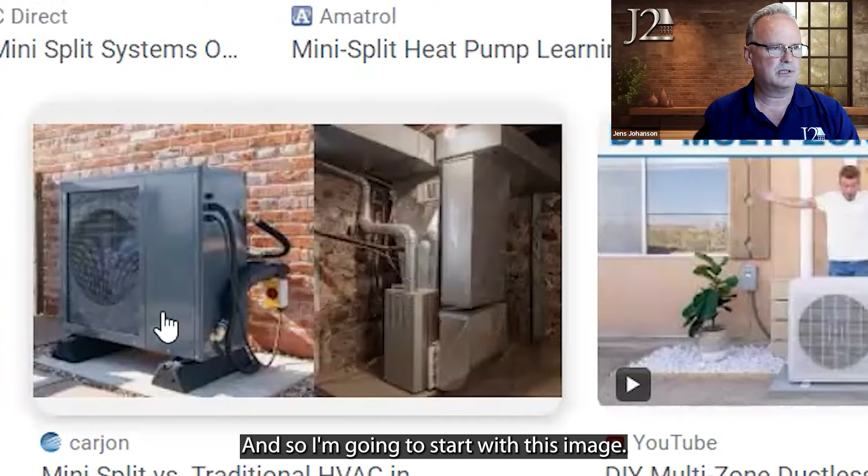And so I'm going to start with this image. And this is the old school forced air, what we used to call, just central air. And so you've got an exterior, I call them heat pumps, they're condensers, things like that. So you got an exterior unit. You do have some condensate lines over here. You've got some electrical, but it ultimately comes to your furnace.

You might have another unit right here, or this may be part of your furnace system. But the idea is that any cold air comes into a trunk line that then attaches to the rest of your ductwork. And so that outside unit has to be big enough to cool the entire house. So it just plumbs into your existing heat duct system.

So this is a central air idea where I've already got a furnace, I've already got ductwork, and I'm just kind of putting a trunk line on it so that I get cold air out of every vent in the existing home or office or whatever you have there.

And so it's kind of similar, but you have this pad mount unit, you have some condenser lines, you have some control wires, things like that, but you have kind of this bigger heat pump.

Now, let me take you over to this one, which is an image of a multi-head mini split system using one exterior mounted condenser. So the difference between the mini split and the forced air system, the mini split has these nice, attractive, you can see over here, these high wall mounted units, maybe one in the common area, one in the bedroom, but we'll get into that later.

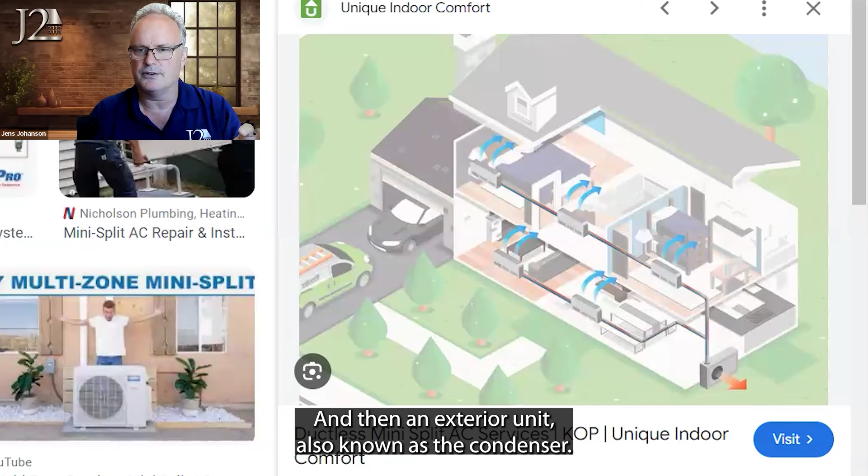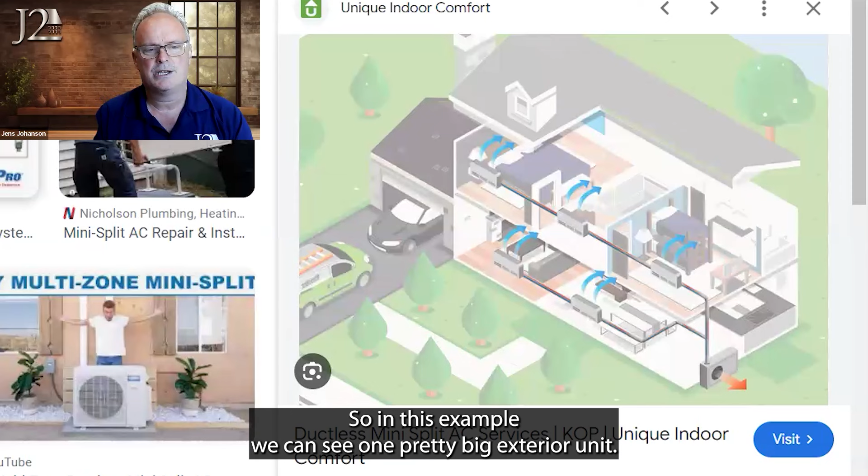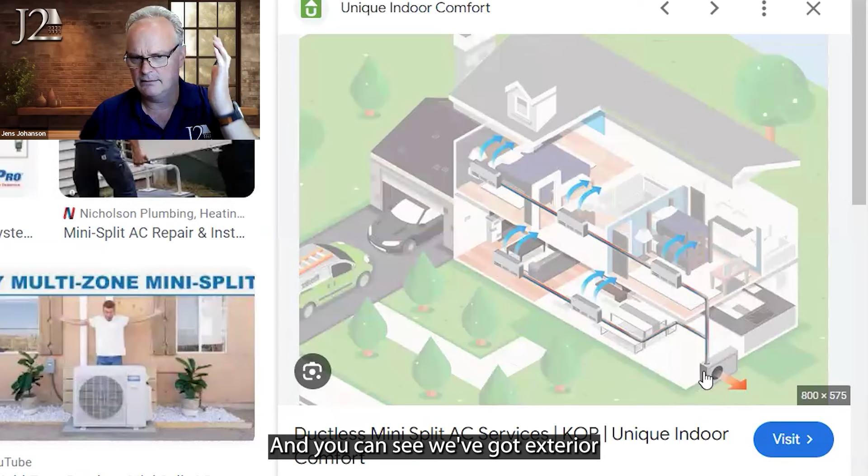But you have an interior unit, we'll call it a mini split interior head, and then an exterior unit, also known as the condenser or the heat pump. I'm sure I'll get some critique on that, but for purposes of this, we're talking interior and exterior unit. So in this example, we can see one pretty big exterior unit plumbed to 5 interior units. You can see we've got exterior condensate lines, but then it goes inside.

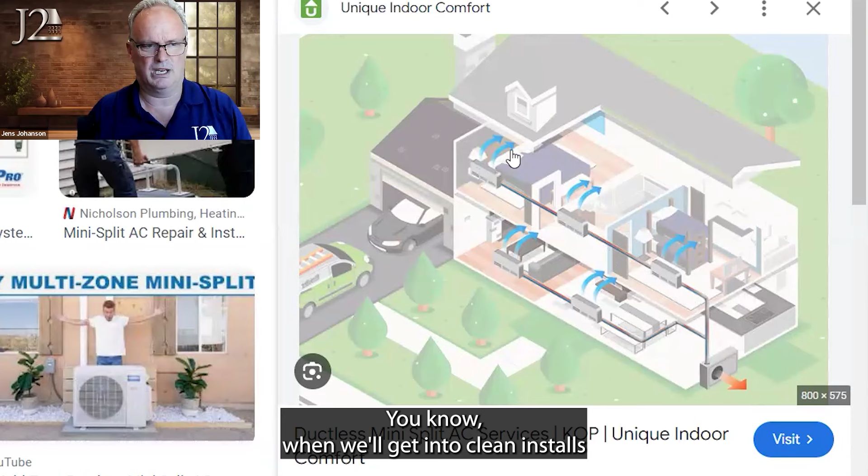I'm assuming these lines are buried in the wall, and that's something else to consider. In new construction, we can put all the stuff in the wall, you don't see anything. In existing construction, where we're adding it, we're either cutting into the wall or bolting this stuff to the outside of your building, and even on the inside, covering it with some kind of conduit. We'll get into clean installs and not clean installs.

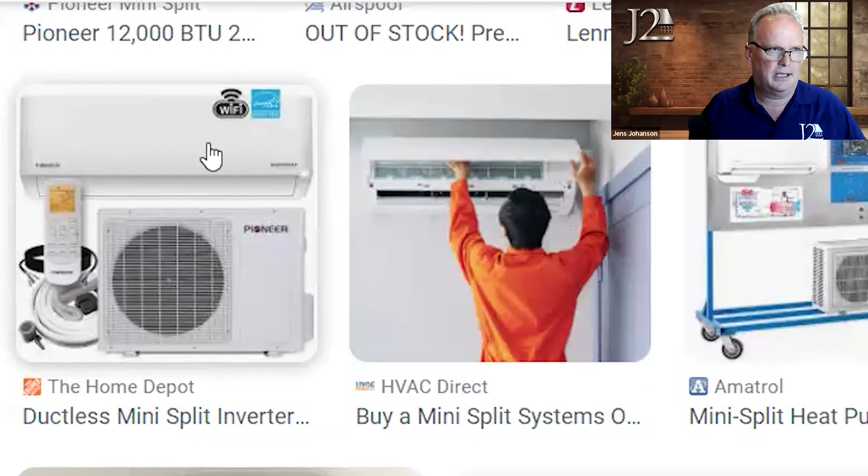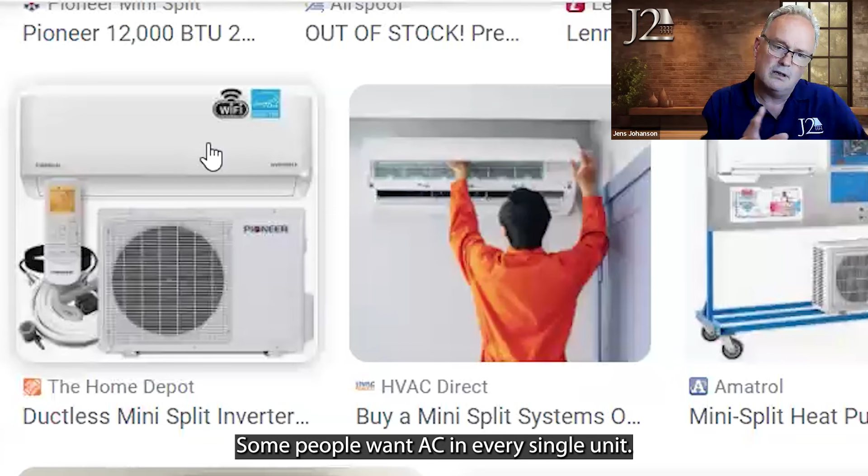So here's an example of a 5-head unit, and here's a photo of just a 1-head unit. Condo units will call and say, hey, I've just got a 1-bedroom, 600 square feet, I just want one interior unit in the main common area. I'll run that when it's hot outside and it'll cool down the unit. If I want to get extra special, I'll put 1 head in the master bedroom and 1 in the common area, so now I've got a 2-head unit. Some people want AC in every single unit, so then you put in 5 heads like this diagram.

What if I've got unit 301 that's elevated, 3rd story, and they want to put it on their deck? Now I'm going to have vibration noise. This thing is a big fan, it runs and makes noise, and that's going to reverberate through the entire building or an area of it. When you've got a party wall, they have their deck and the other guy has his master bedroom. Well, I'm trying to sleep and I hear his vibrating exterior unit on his deck. So there are some things, insulating feet, rubber gaskets, anti-vibration mounts, we're thinking about.

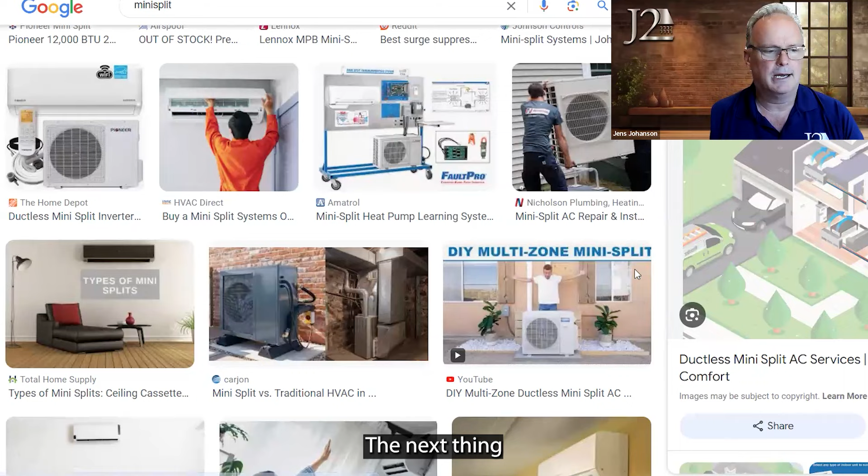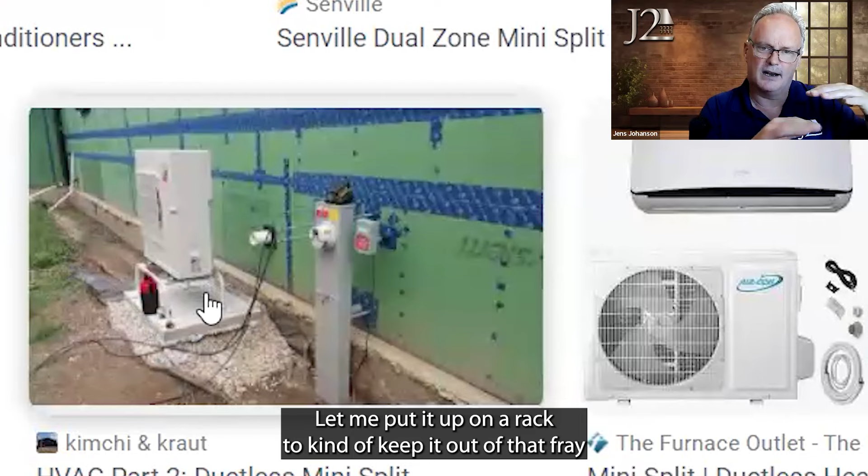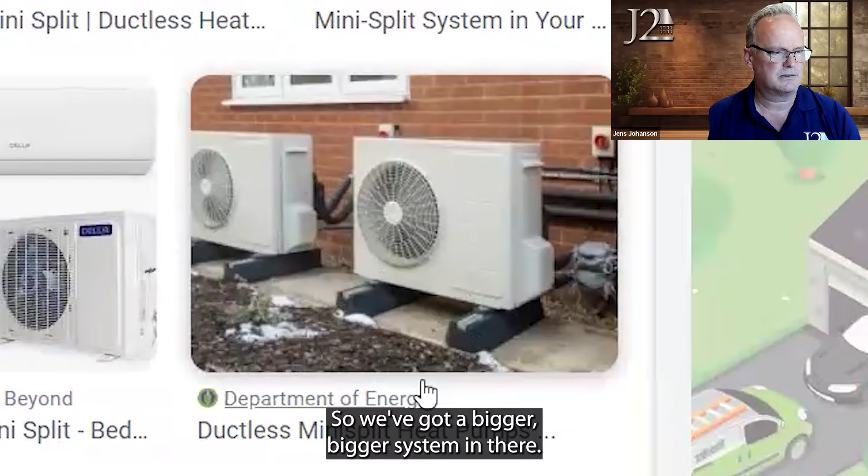Let me scroll through and find it for you. Here's another pad, here's another pad. Let's talk about that pad with the rack, a pad with an elevated rack. This is necessary for locations that have constant snow on the ground year round, or in more sandy, arid, dry, dusty areas where the wind blows and dust is blowing across the ground, or leaves and pine needles and things like that. Let me put it up on a rack to keep it out of that fray so I don't get so much sand and dust in there. So this is an example of a unit sitting on a pad, but also on some rubber footings here. And here's 2 exterior units, so we've got a bigger system.

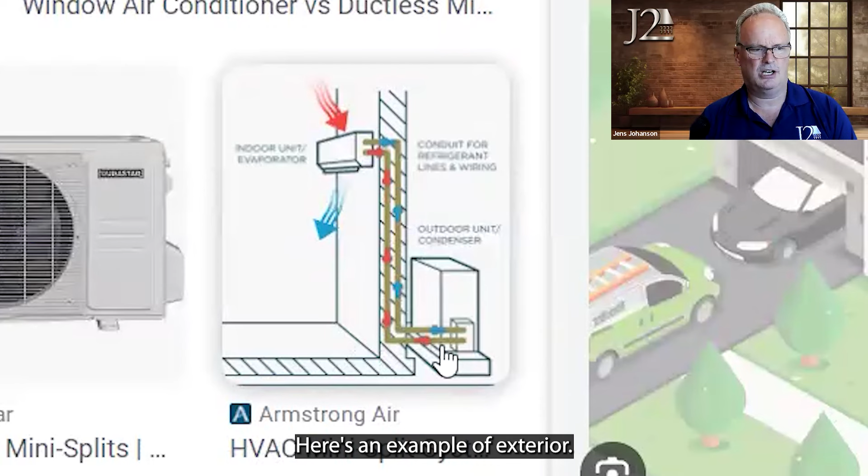Let me find our... here's an example of exterior where I can run my lines inside the wall into the unit. It's real clean, I don't see a bunch of outside stuff.

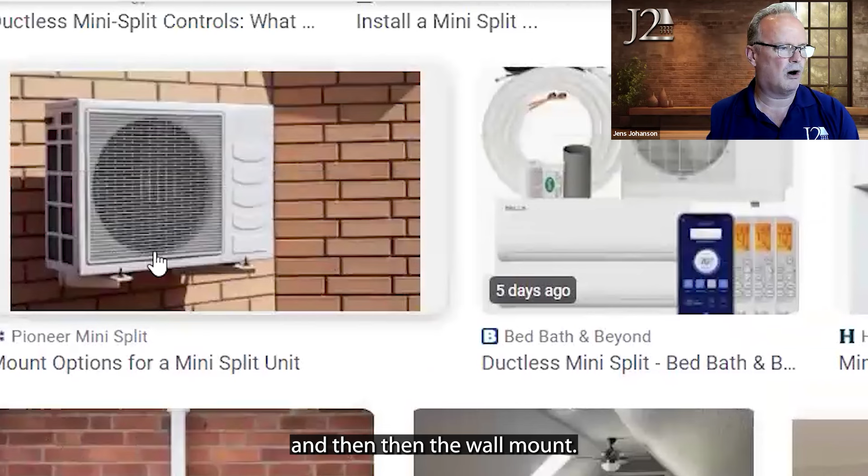And then the wall mount, that's the 3rd option. I've got some steel brackets mounted to the wall, and this thing sits up on the wall. Again, it keeps it off the ground, out of the snow, out of the dirt, or it's for an elevated 3rd or 5th floor unit, and we've got these things bolted to the wall.

So again, we've got vibration, and now we start getting into looks or aesthetics. If I'm standing at the street and I see this beautiful 3-4 story building, and now I see these heat pumps or exterior condenser units kind of mishmashed all over, not in a nice line, not sequential, not a pattern, versus I'm going to put mine here, mine here, mine here — you start getting into what looks like real ticky-tack bolt-on after-effects.

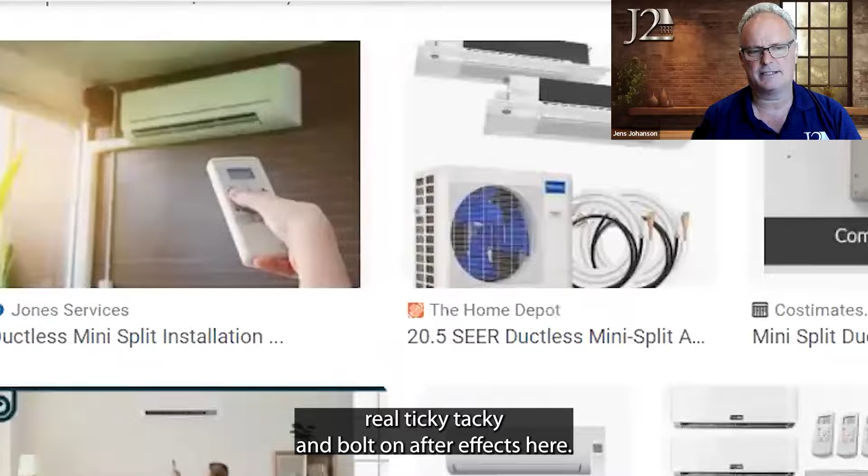So anyway, I'm still on the Google thing. Let me just take you through some of these pieces now that I've set some of the groundwork for you.

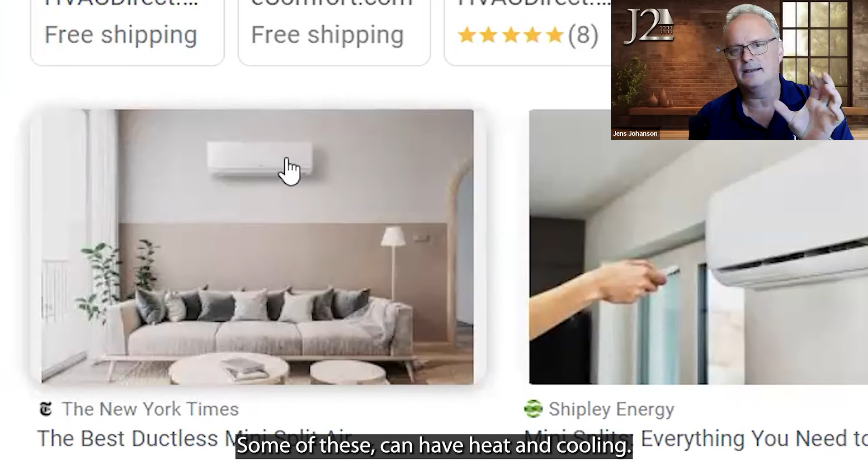They're the head unit, nice little attractive units above a couch. The cool air is going to blow on me. Another thing we can add on while I'm thinking about it, some of these can have heat and cooling. Some are just cooling, so it's important to understand what you have there.

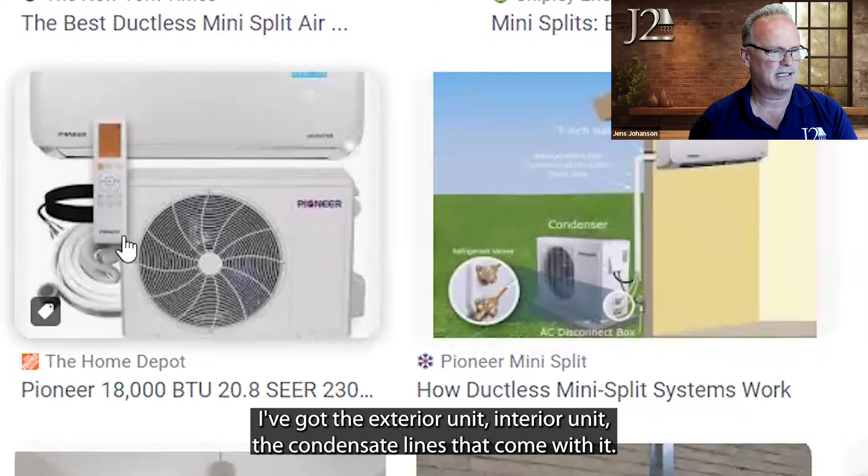This is a one head unit. I've got the exterior unit, interior unit, the condensate lines that come with it. Here's an example of that diagram, and here's what we're talking about.

It says 3-inch hole through wall, and how we prepare that opening, make it watertight, tie it into the existing WRB, make it like any other penetration, like a bath fan or light fixture. Put flashing above it, as opposed to doing your best and caulking the rest, or spraying foam around it and hoping it won't leak.

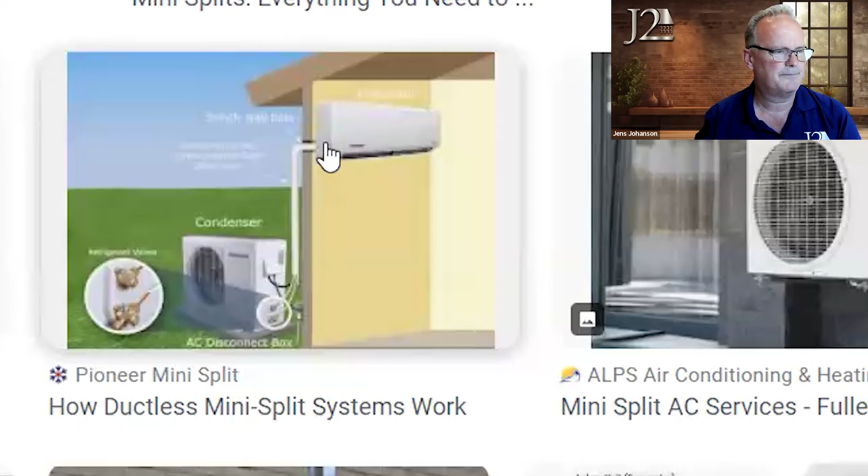So here you can see an exterior wall mount unit. It's a pretty small one, but still mounted to the wall, mounted on the brick.

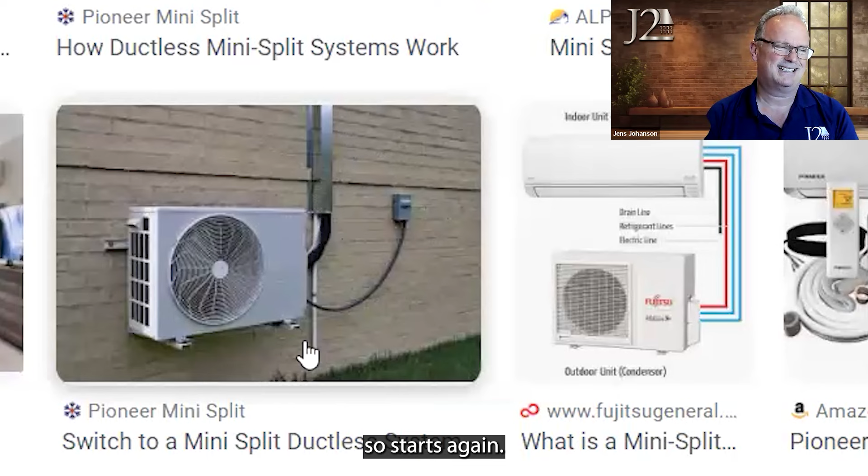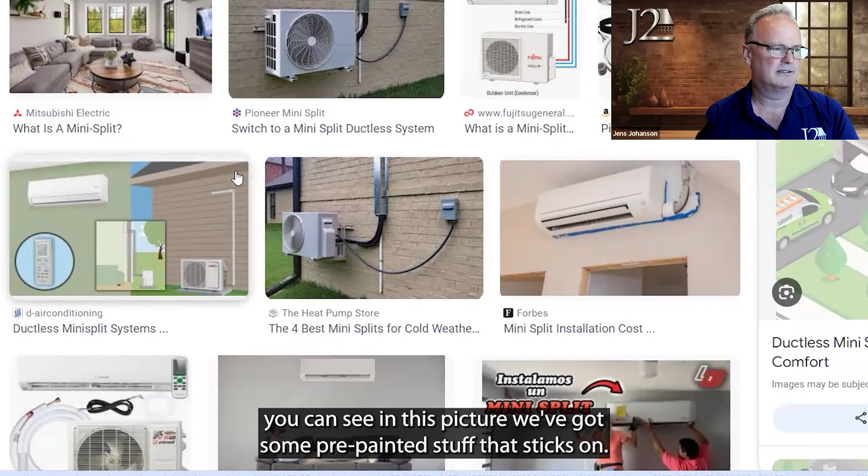Now we've got a bright, shiny conduit, a big long pigtail to the 220 outlet, so it starts getting kind of busy. It's square conduit, we've seen some round conduit. Here's some other examples - you can see in this picture we've got some pre-painted stuff that sticks on, looks a little cleaner.

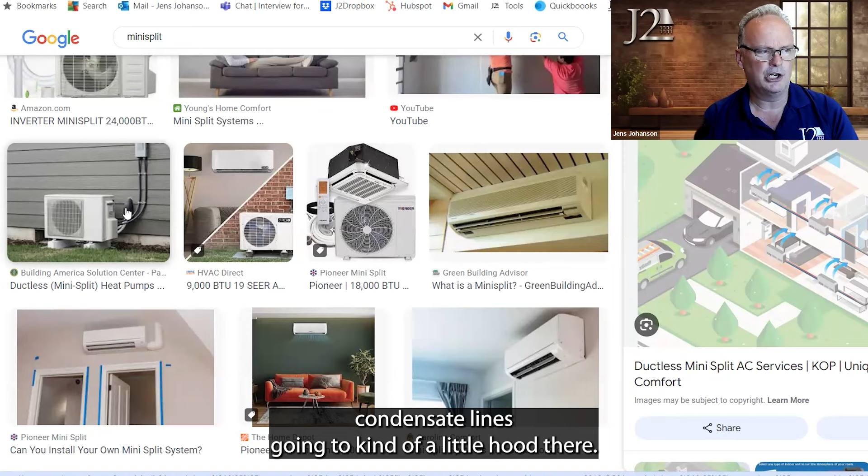An example of exterior mounted unit, condensate lines going to kind of a little hood. Then we got some ugly electrical lines running down here. So how we can tighten these things up and make them cleaner is important for everybody's benefit.

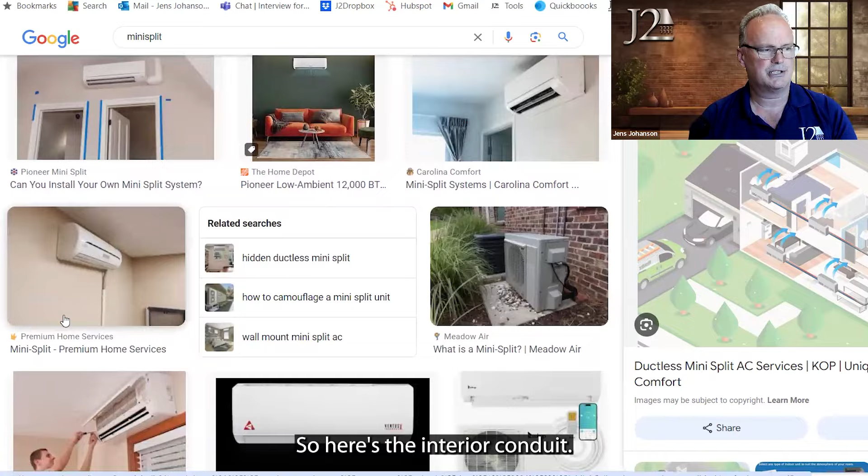So here's the interior conduit. Maybe they came through low and went up the inside of the wall, wrapping it in some plastic stuff. So again, some things to think about.

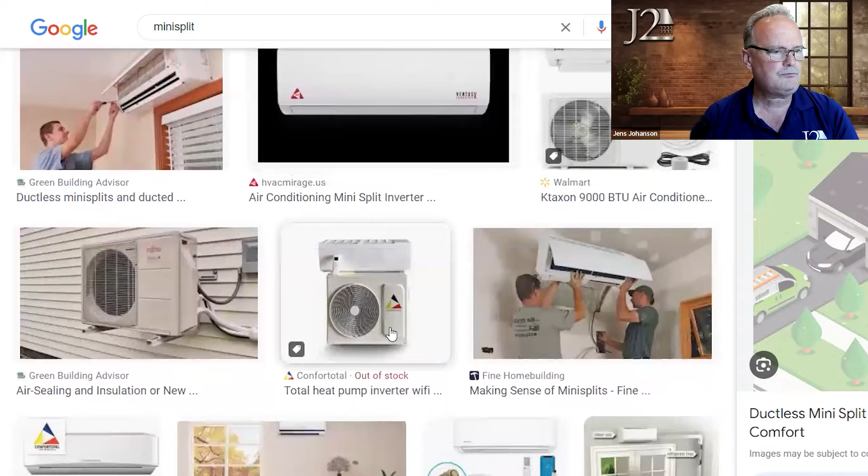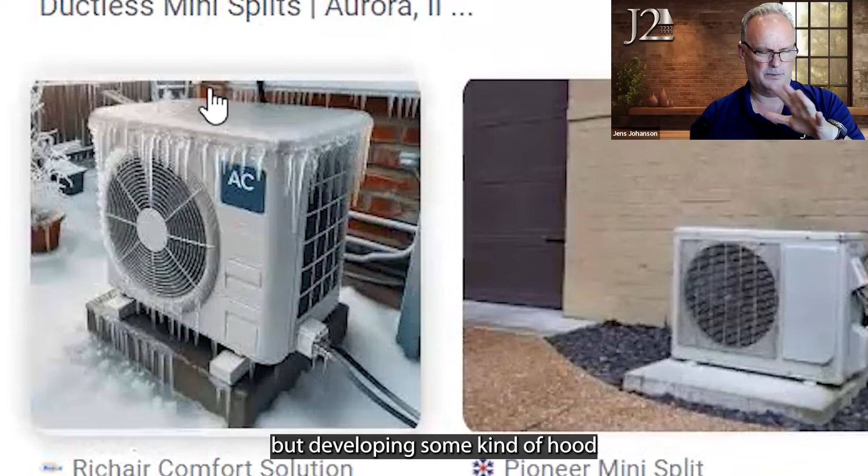But developing some kind of hood to keep the ice or snow out from it depends on the condition and environment you're living in.

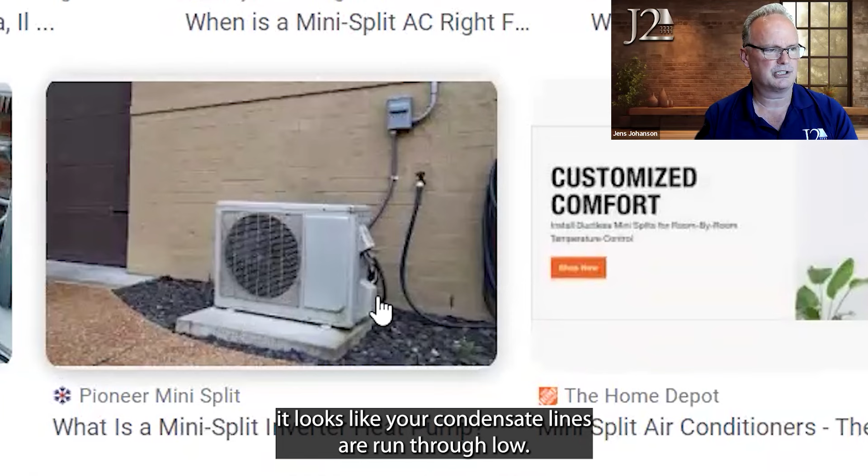Here's a pretty clean one on a pad, has some conduit, again exterior electrical conduit, and then it looks like your condensate lines are run through low. The interior units look good.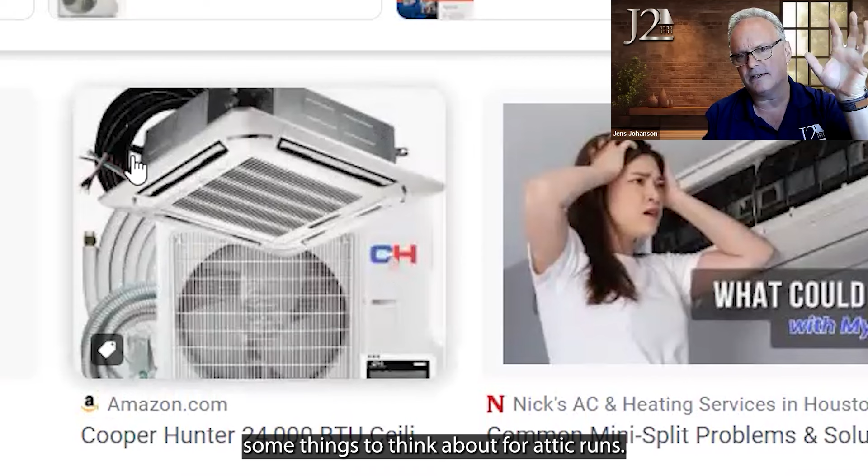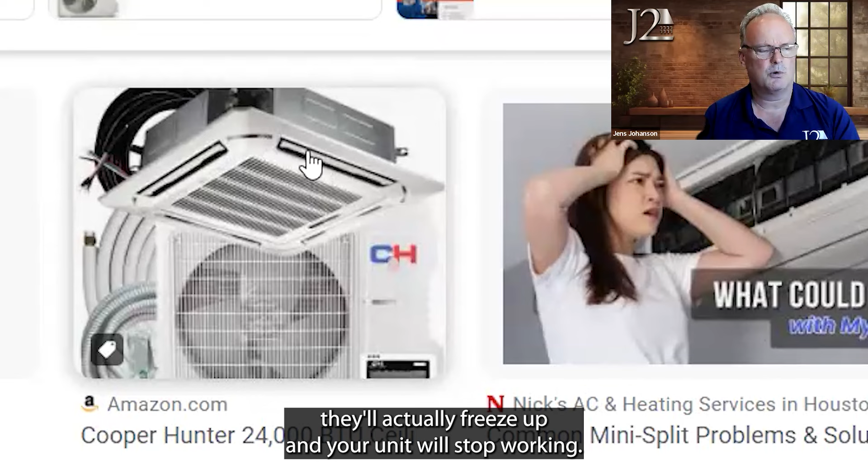Some things to think about for attic runs - we see some condensate lines or drain recirculating lines, whatever you want to call them, they will freeze up. If the attic isn't insulated, or if there's fresh air flow, they'll actually freeze up and your unit will stop working. So how do we heat tape those, how do we make sure they're working correctly?

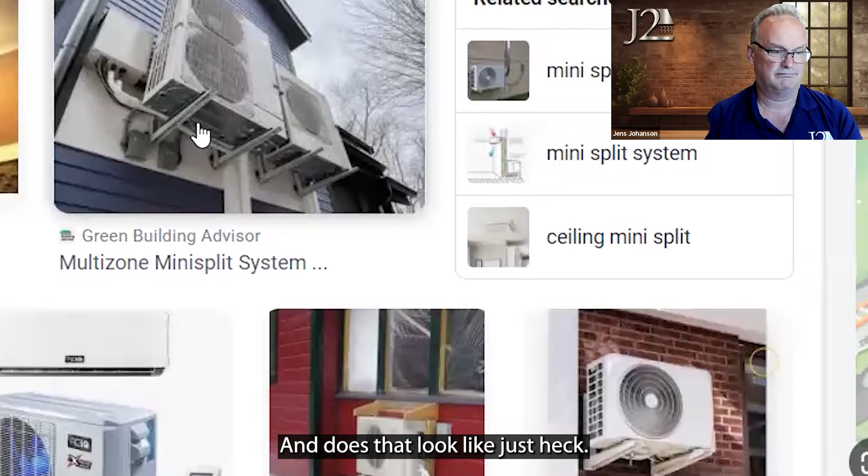So here's a big old double unit, probably for multiple zones, and another one. It's bolted onto a big panel. Okay, now we start - what's on the outside of my building, and does that look like just heck? Those are some things as a board you want to be thinking about.

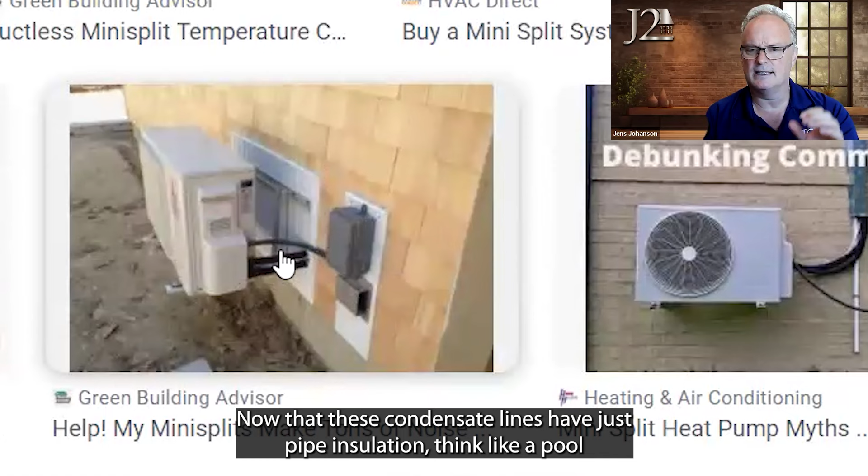Let me show you, here's a nice clean install. This is some kind of panel, takes their condensate lines through. Now these condensate lines have just pipe insulation, think like a pool floaty, and UV will actually break down that pipe insulation - it'll get chunky and start looking crummy. So you want to wrap those.

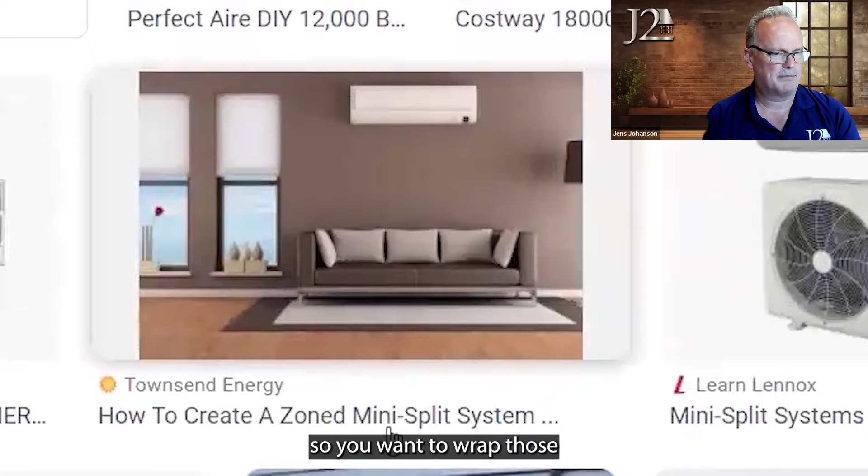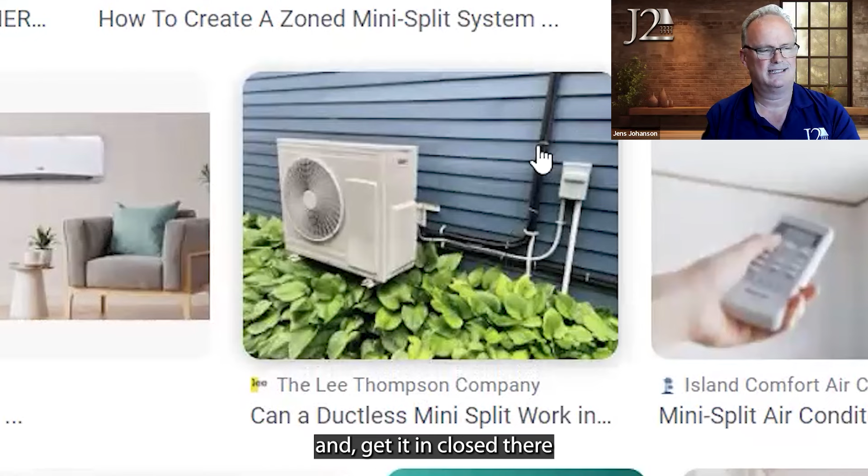This starts looking kind of chunky. You got, again, that foam insulation with zip ties and cables, and you want to get it enclosed, or get some kind of chase built or something like that.

Here's this chase or conduit stuff that they sell for the inside - they also sell it for the outside. It's important that you have a through wall penetration that, again, is watertight.

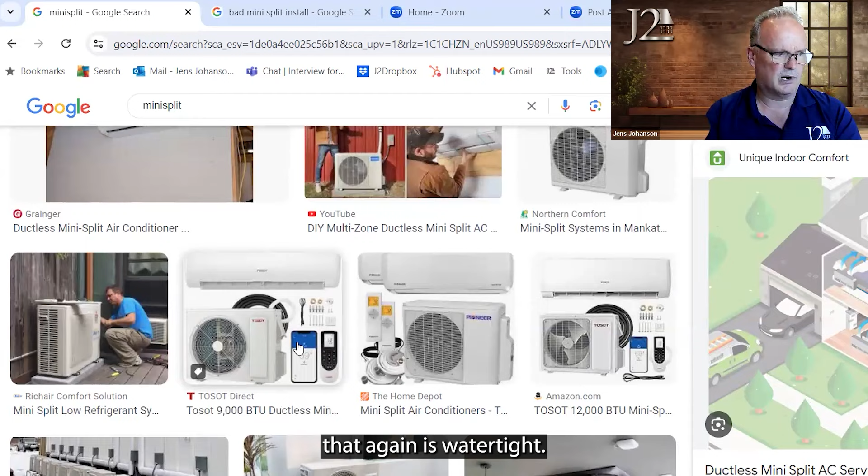Here's an interesting example of an entire building - they've chosen the back corner. You don't see this stuff, but it's kind of a decision on an area to put these things, and we have a whole bank of them. They're all up on racks, they have nice clean conduit, all your electrical boxes all line up nicely. It's well done, it looks as clean as it can look, put it that way.

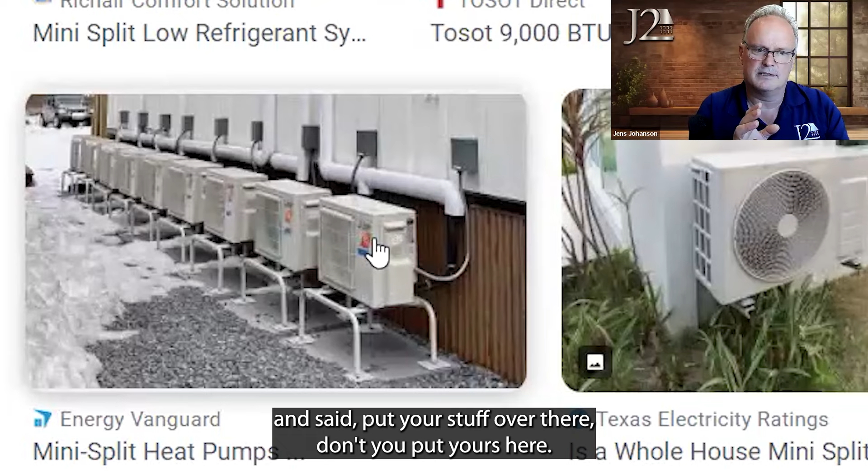But this is - so the building has gotten together and said, put your stuff over there, don't you put yours here, you put yours here - and it starts looking like a bad case of the measles with all this stuff all over your building.

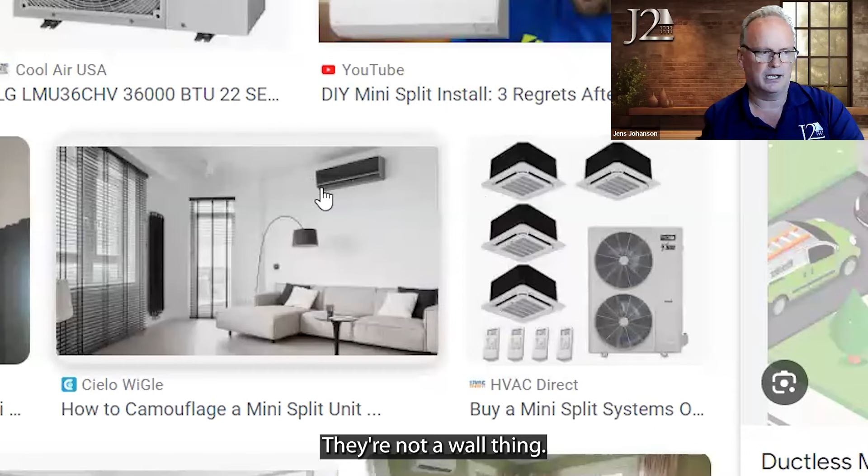Here's an example of again a ceiling mount system. You put them up in the ceiling, they kind of disappear. They're not a wall thing sitting on your wall.

Couple of other things to think about besides that through-hole penetration and vibration we've talked about: the exterior clutter of conduits and piping, a mishmash of exterior clutter, a bad case of the measles. They have their unit here, their unit here, all over the place, and it really starts looking crummy.

We've got to understand proper sizing, because that's where we see some of these fail. Each unit will say it'll cool your space to a certain degree if your unit is a certain size. So I've got a 900 square foot condo unit, but my heat pump says it'll serve 800 square feet, or bring it down to 65 degrees. In that example, I've got a bigger floor plan than the unit on the wall can handle.

We see this in developer grade construction — they provide the cheapest, smallest unit they can and point to the AC and mini split system as a benefit, but it won't cool the unit down enough. It's too small, working nonstop, and it freezes up or burns out. Pay attention to sizing and make sure you have the right size.

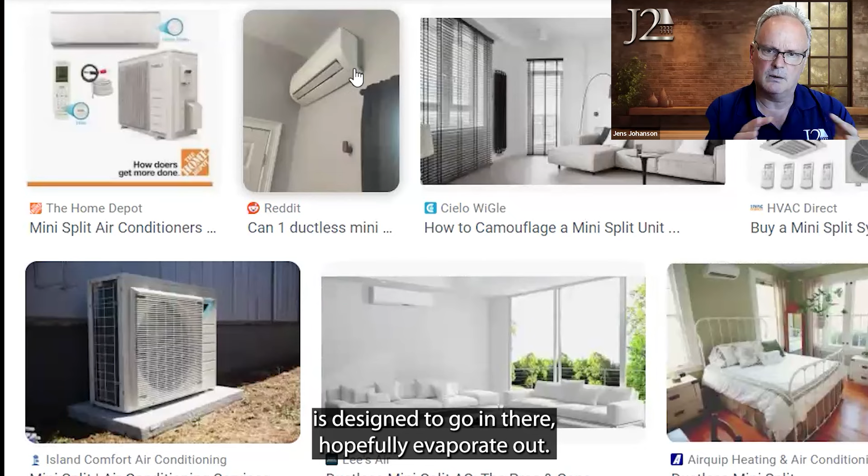The through-wall penetrations always involve sealant, which needs to be maintained and checked. The interior units also have a drip pan, like an evaporative pan, designed for condensate to collect and hopefully evaporate, but occasionally you have to clean that out and make sure it's not running back into the wall or draining down it. I'll show some of those photos a little bit later.

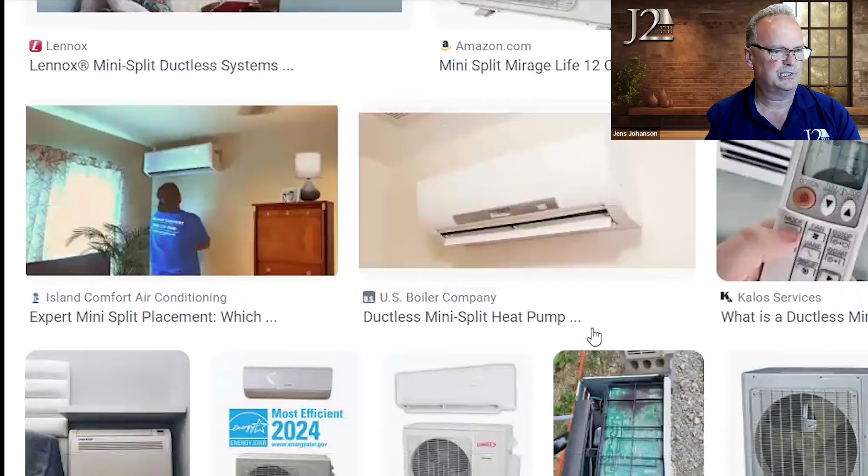Do yourself a favor when you're exploring this — just Google mini split, and you'll see some of these things. You'll find videos to watch, and you'll see the issues we're concerned about.

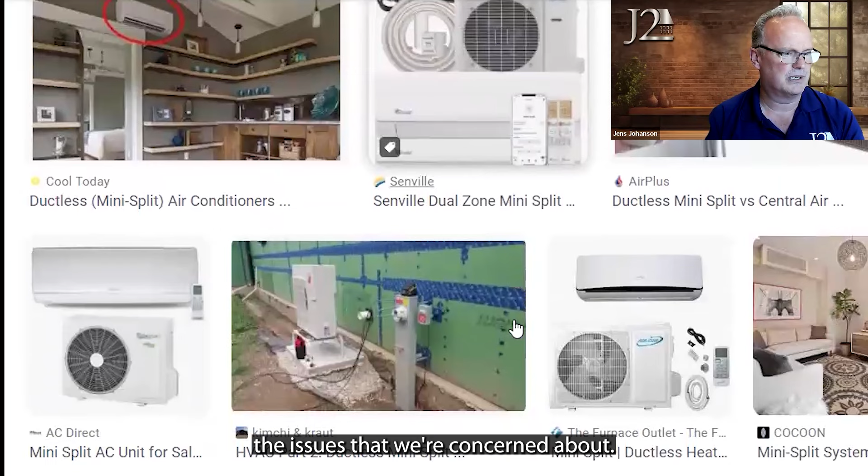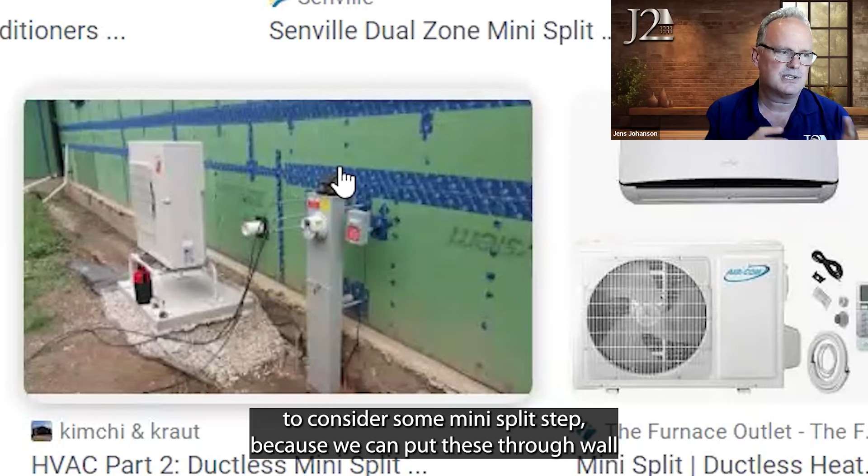Here's a good example of new construction, or at least replacing the siding. When we're doing exterior strip and reclads on existing buildings, replacing siding and fixing water damage, maybe updating windows, now is a great time to consider mini split stuff, because we can put the through-wall penetrations through the WRB, flash them correctly, and bury the lines in the walls.

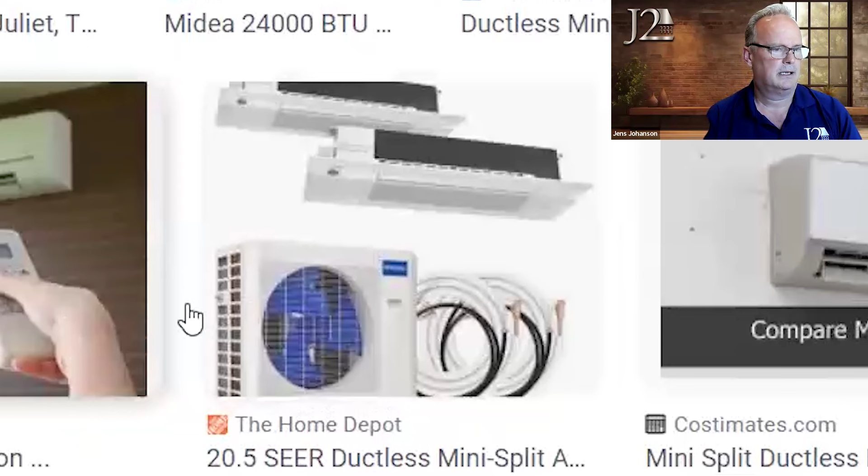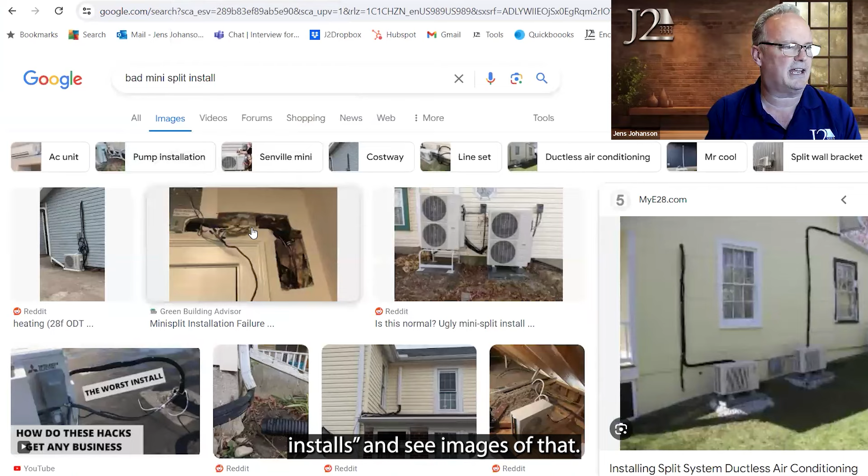Now, because Google is Google, we can just type in bad mini split installs and see images of that. So here's the big picture: I've got 2 exterior units, pipe and hose running all the way all over the building, and the foam isn't wrapped — it's going to degrade there.

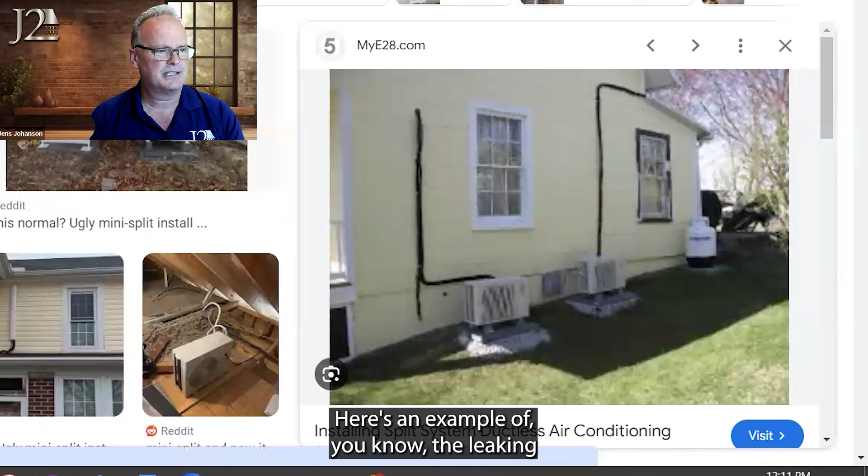Here's an example of leaking condensate lines that caused a whole bunch of water damage. We've got some rickety electrical with wire nuts not put in a box — just be careful about that.

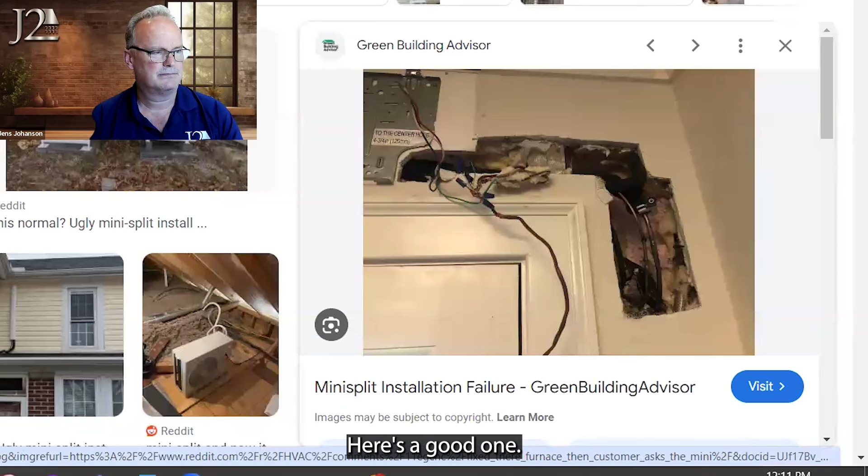Here's a good one — I didn't blow up the picture any, but I've got a whole bunch of excess hose and weird conduit running around.

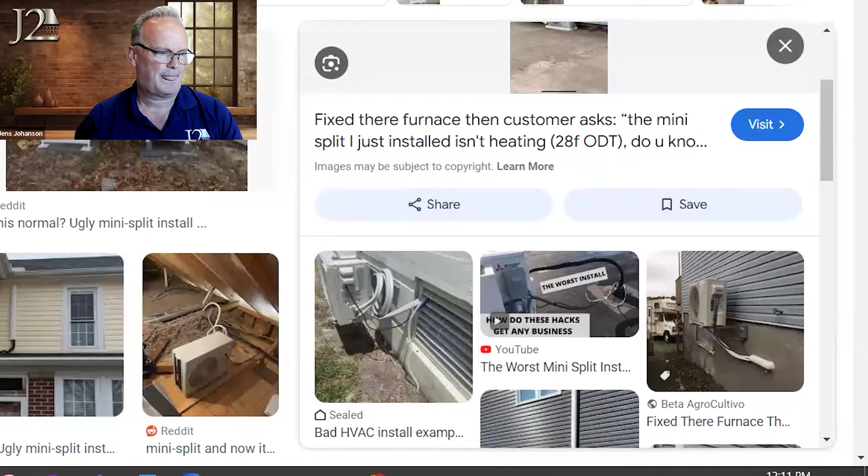Here's a classic — oh, look at this downspout, it goes up to the 2nd floor. 'I'll just run my condensate line up the downspout.' Give me a break, how's that supposed to work? Now you're blocking the downspout.

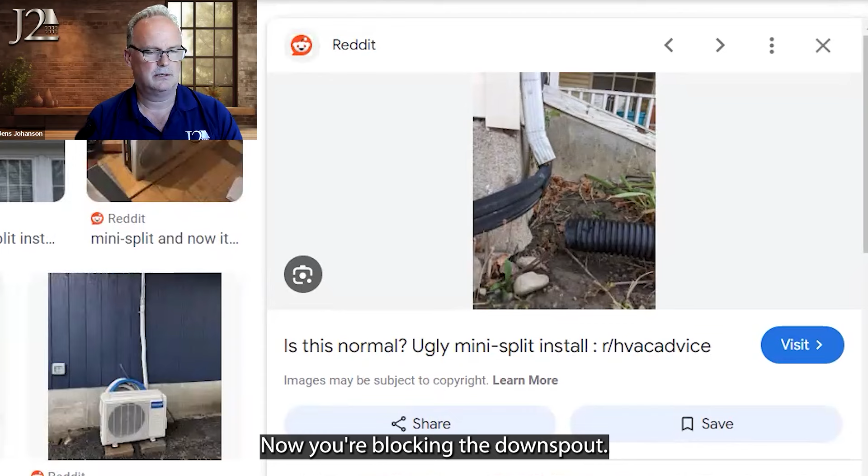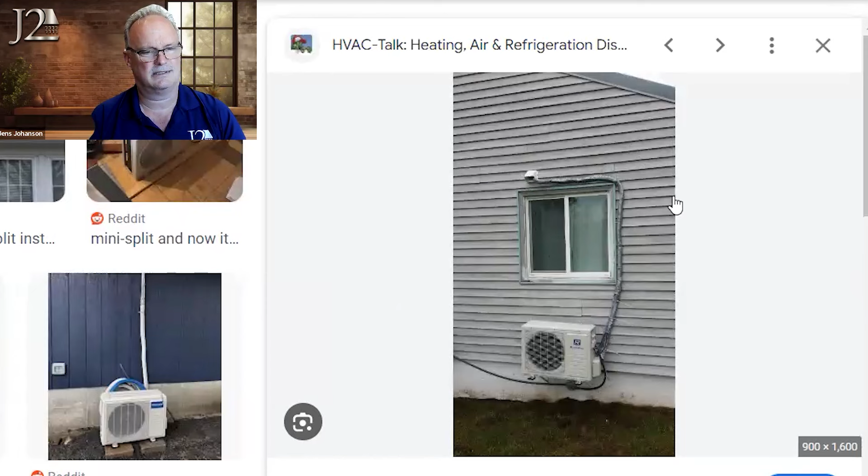Another crummy example — I've jammed my lines through the bath fan duct into the unit, and this would look bad in a trailer park, much less your beautiful condominium complex.

Just making sure the installer isn't simply zip-tying his extra excess line and leaving it there — he's actually shortening it. They give you a 20-foot line with flared fittings on it, so it's harder to trim the line and put a new flare fitting on correctly. But this looks terrible.

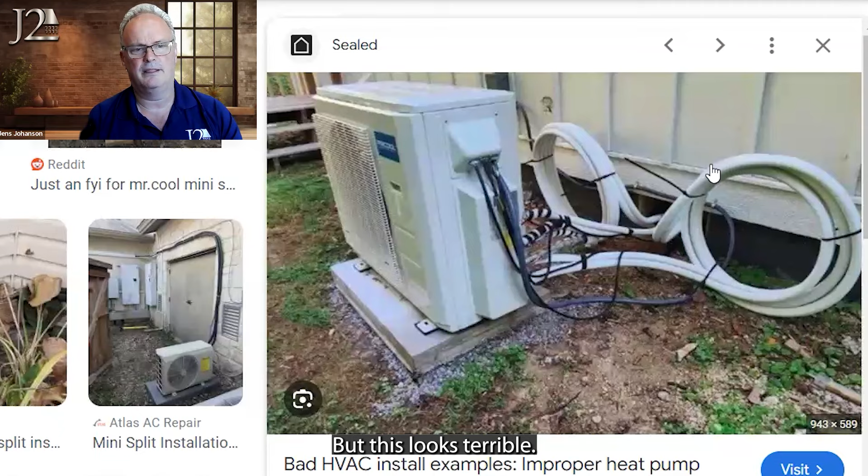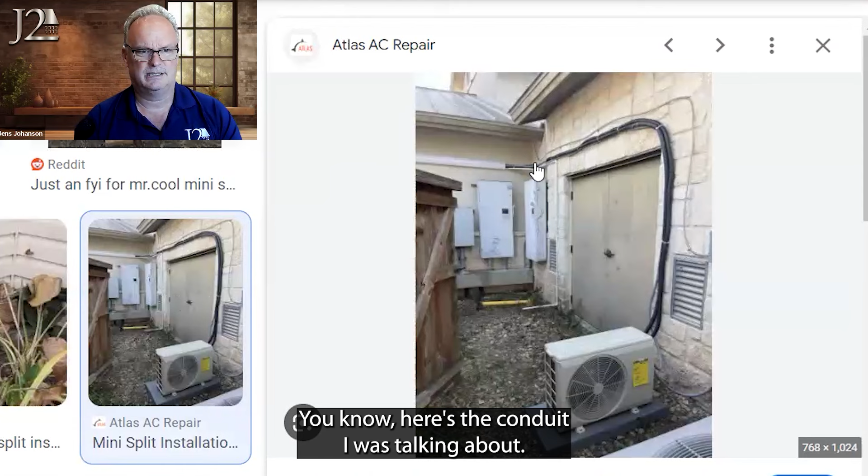Here's another one — just wow. Running, here's the conduit I was talking about. Here's no conduit at all, it's just a mess. So Google bad installs, and you'll see what we're talking about.

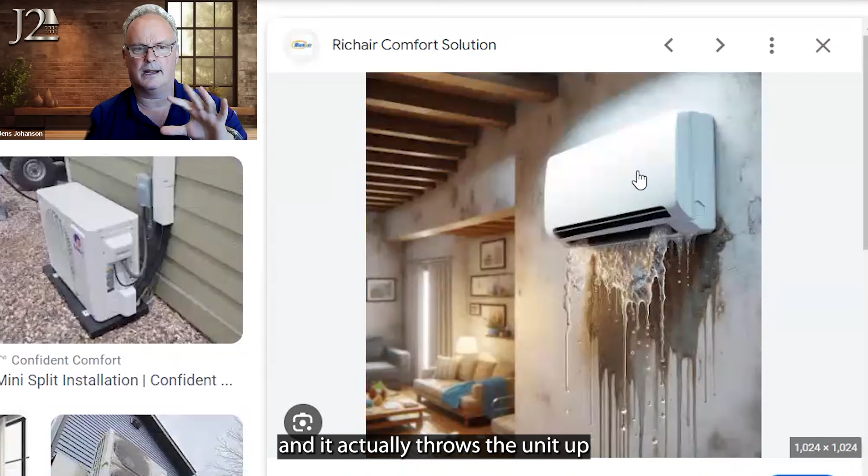Here's a frozen up unit — it's been working too hard and actually froze up, or it's flooding because it hasn't been drained. I saw another picture of what it looks like when they leak.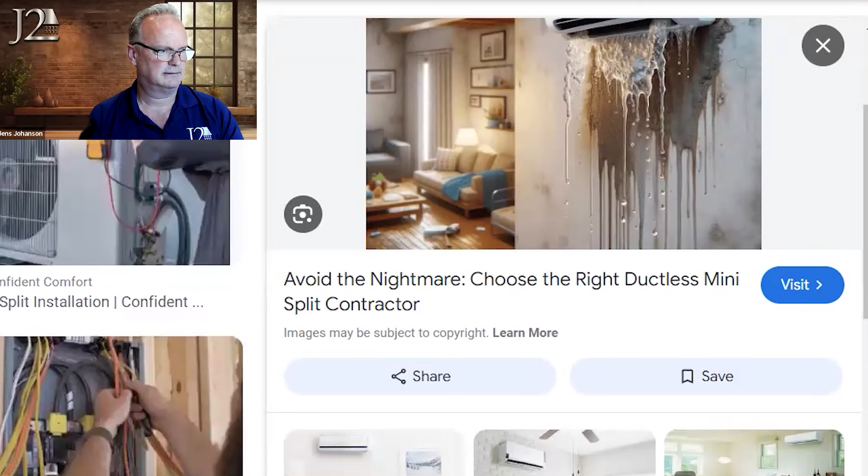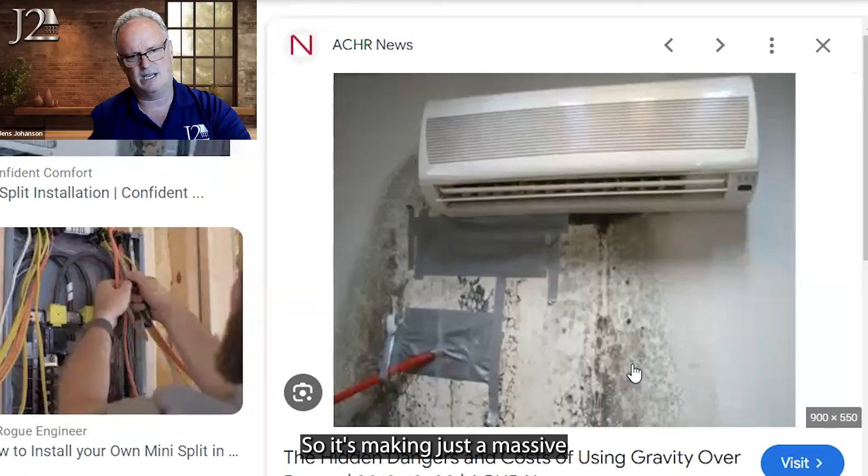I'll find it here — here you go. All the mold dripping down the unit. So what's happening? Anything level that you put on a wall is never perfectly level, it's always tipped just a hair. You can see this unit is low on one side, and guess what — all the water is dripping out of that side, making a massive drainage and mold problem all over your walls.

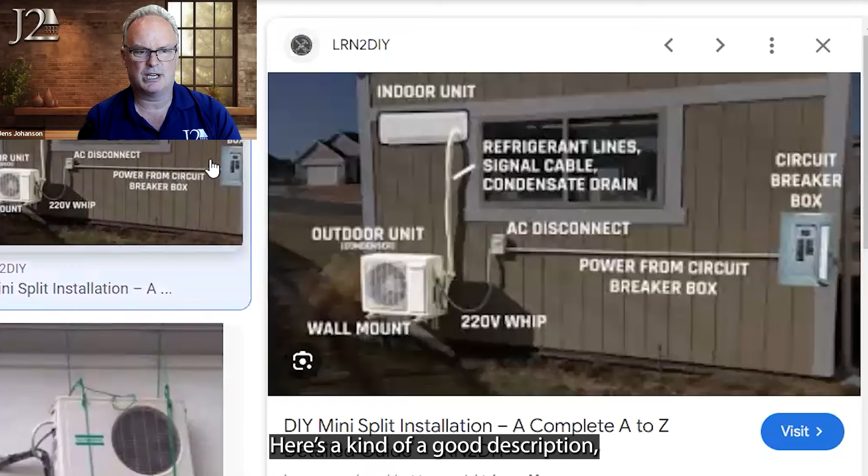Here's a good description. So we need 220 power, and that's the other thing. If I've got an old condo unit that has a small breaker box and there's no more breaker space left, how am I going to get this 220?

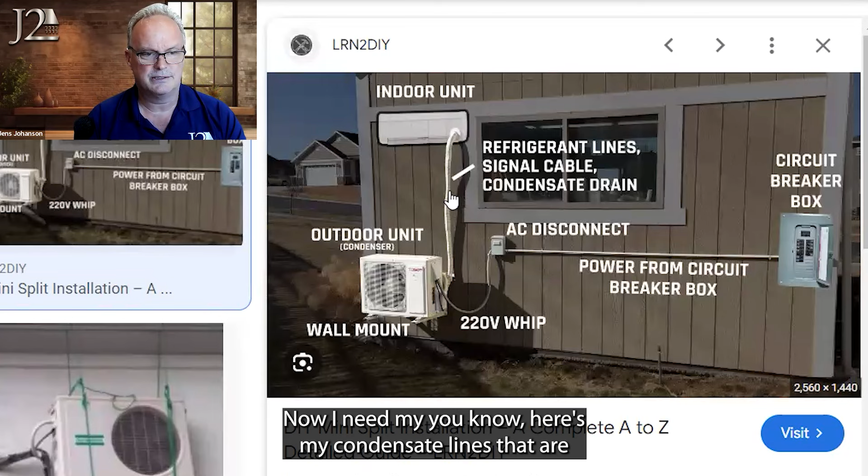So I need a double pole 30 or 40 amp, the size of a range or a dryer or something like that. In some instances where we used to have electric dryers and converted to gas, now we've got this space - that's a logical place to use. Otherwise, now I need conduit running across, condensate lines that are exposed, and it just starts getting messy.

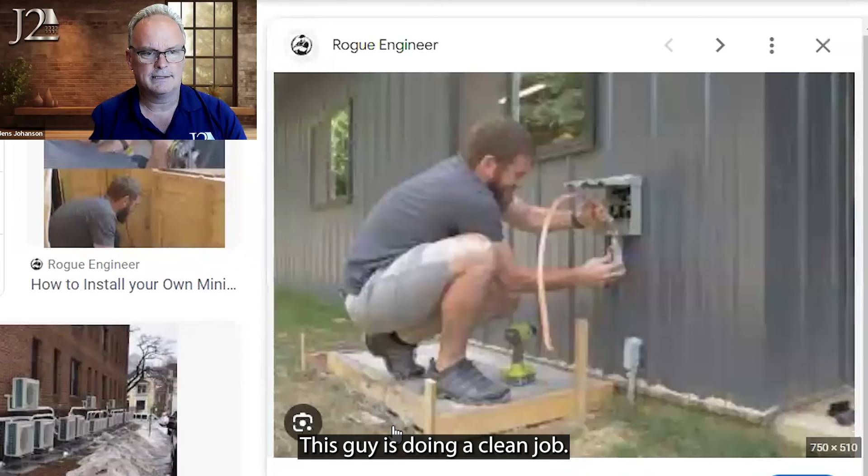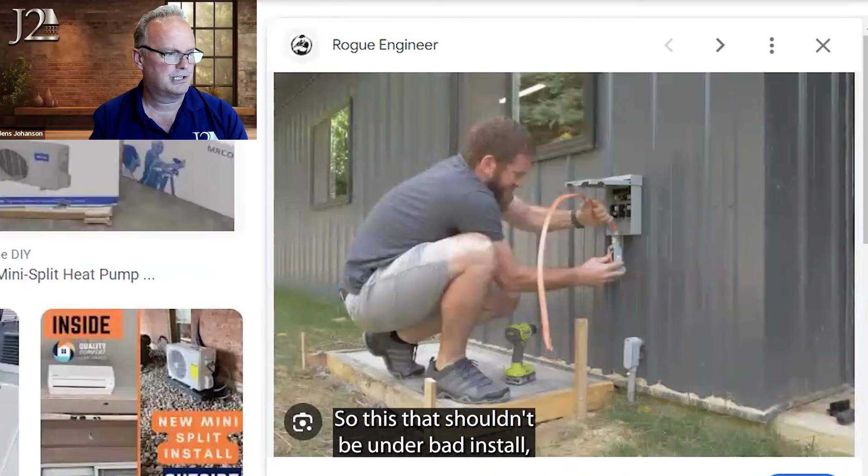This guy's doing a clean job. Electrical box right there, electrical things right there, nice concrete pad. So that shouldn't be a bad install. But you get the idea.

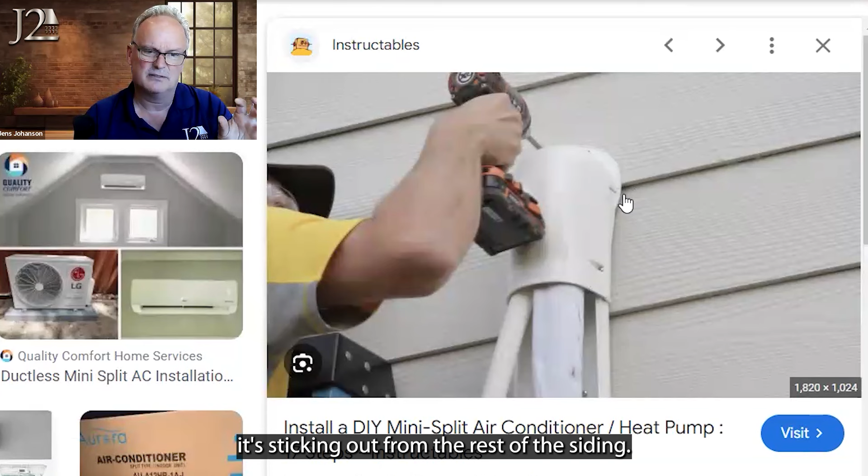Here's what we see a lot - this exterior conduit that's clearly just caulked onto the siding. Since it's bevel siding, it's sticking out from the rest of the siding. So this isn't watertight at all.

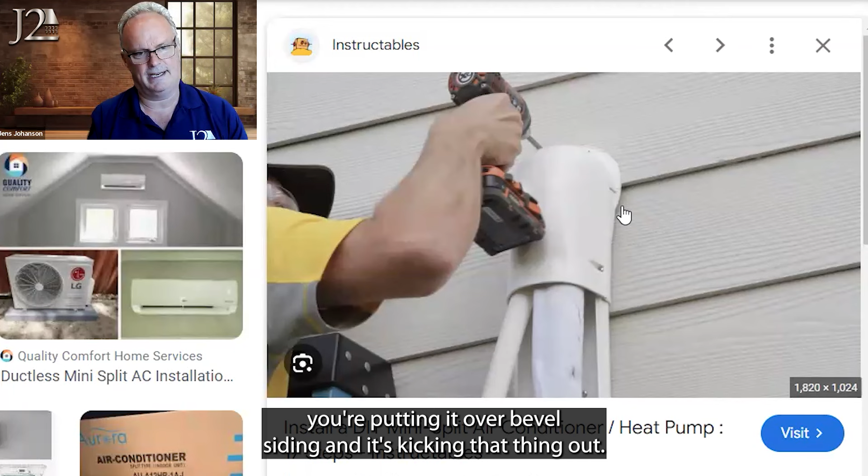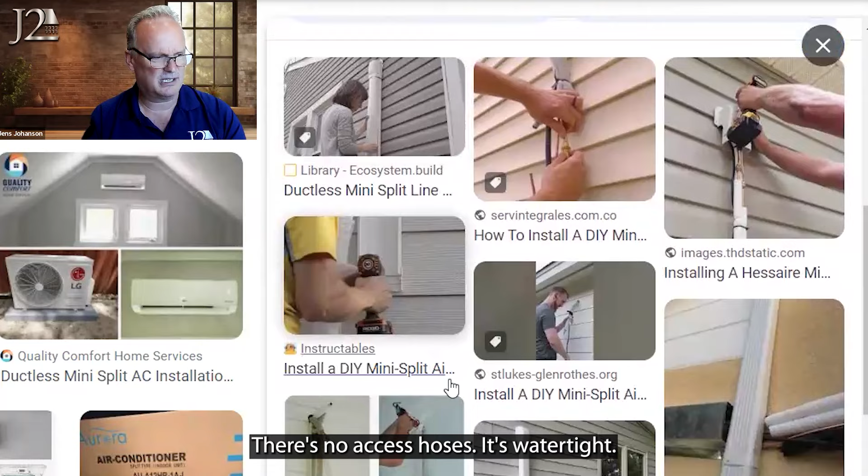It's just kind of a joke. The manufacturer says don't worry, we sell exterior conduit, you can put it over there. Well, they didn't know you're putting it over bevel siding and it's kicking the thing out. So these are the things we're trying to work with the communities on - make sure you get it well installed, there's no excess hoses, it's watertight.

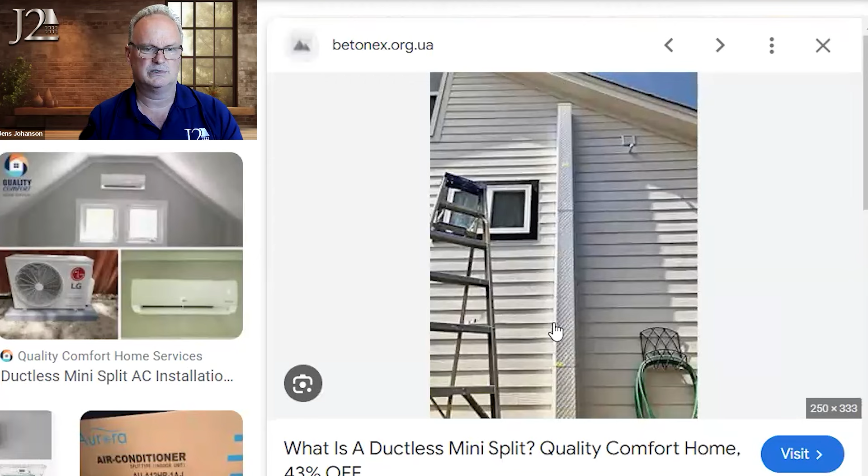I don't know what they're doing here. They're cutting through things, or just putting on a really ugly conduit. So do you want this all over your building? Do you want all these conduit lines, these hoses, these things mounted under a deck?

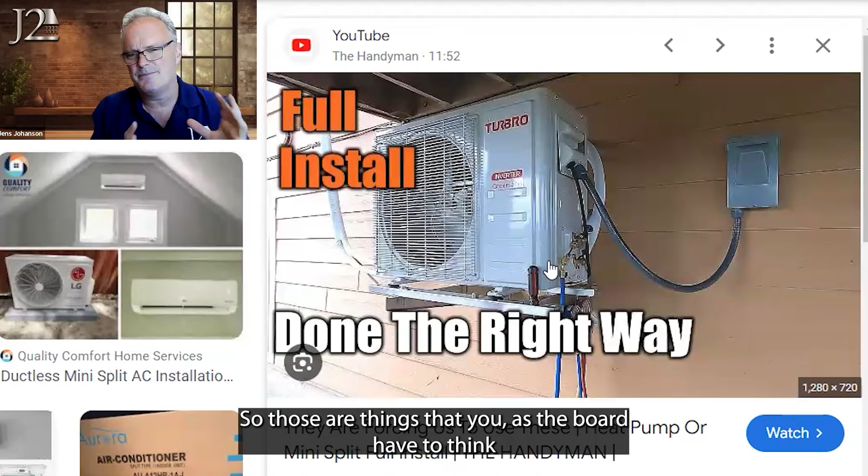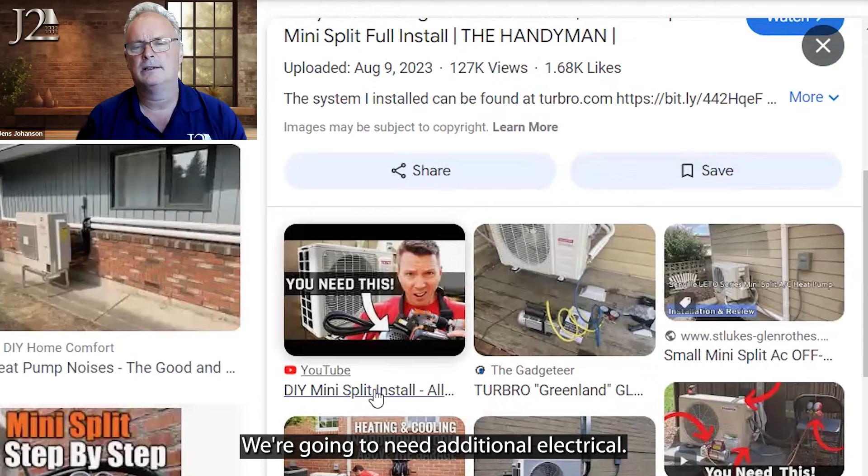Those are things the board has to think about and decide on, because the exterior wall is a common element, right? So when we punch through it, now we might create leaks, we're going to create vibrations, we're going to need to maintain things, we're going to need additional electrical. So those are things to think about ahead of time and build a plan.

Here's one more picture of such a common, bad, sloppy install. We've got two sets of conduit lines drilled through a big hole - these are like 2-inch, 1.5-inch diameter things, and I've got 1, 2, 3, 4, 5. This is like a 6-inch hole. They over-drilled it, jammed all the condensate lines in it, and spray foamed it. It's just going to look terrible.

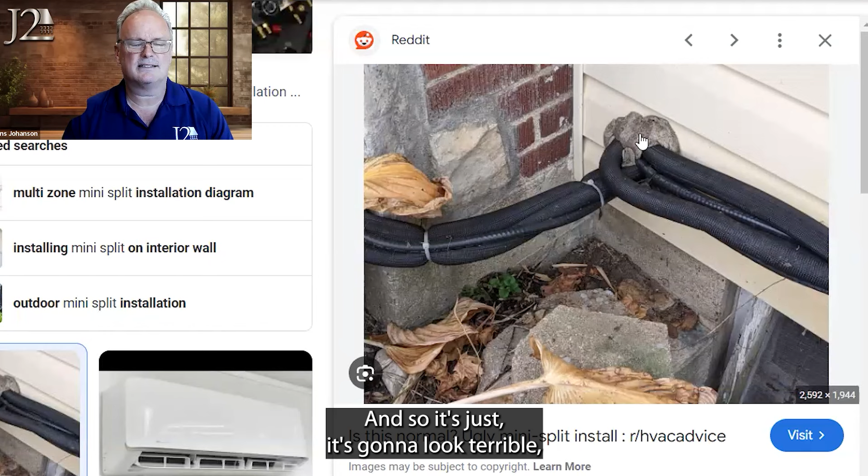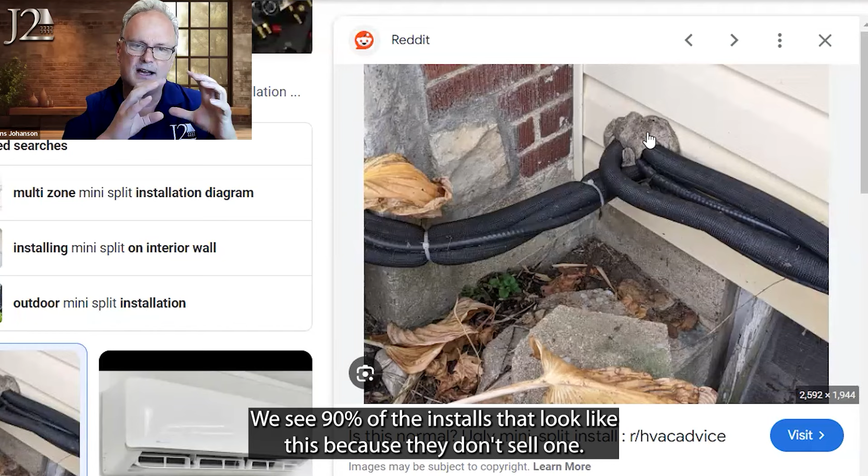Spray foam degrades with UV, the foam insulation on the lines degrades. What a disaster - we see 90% of the installs that look like this because they don't sell one fitting to have all these lines going in. So this is clearly just a big old hole saw drilled right through everything and jammed it in there. They take their rattle can of spray foam and go, it's good enough. Hate this.

Hopefully this has been helpful, explaining mini splits and air conditioning. The boards we're working with tell the association, hey, if you want to install AC, it's up to you - you got to call somebody like J2 to give you a program to go through your siding. Maybe some boards ask us to produce a standard set of details so everybody can use them, and that's a good way to go. So if you want to do that, your installer has to follow these details, and maybe even have J2 come out and inspect to make sure they did follow those details and that it's watertight and your investment's protected.

But it's also a little bit of aesthetic planning - I don't want wires and hoses all over my building, and I want it to not look like an afterthought, a bunch of rickety units that in 10 years are going to look tattered and rusty. So are we maintaining them? Are we repainting them? Are we making sure conduit's the same color as the siding? Are we doing those things? So those are all the things to think about as we add exterior mounted, or afterthought mini split systems or AC systems to keep us cool.